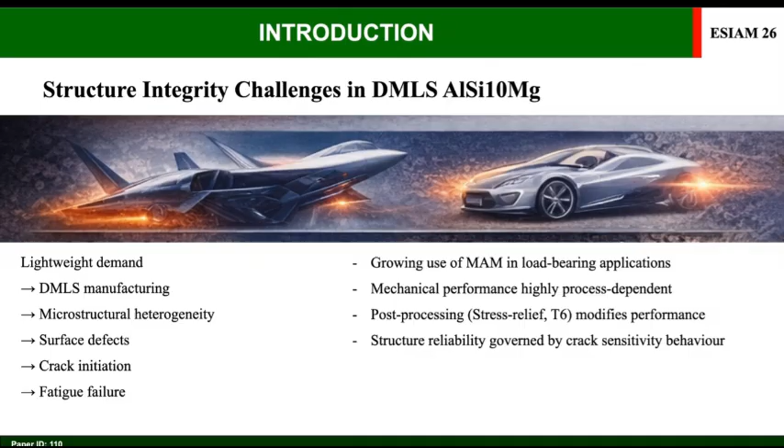Fatigue performance in AlSi10Mg is primarily governed by defect-induced crack initiation and propagation mechanisms. Therefore, the critical issue is not simply how strong the material is, but how it behaves when cracks initiate under cyclic loading.

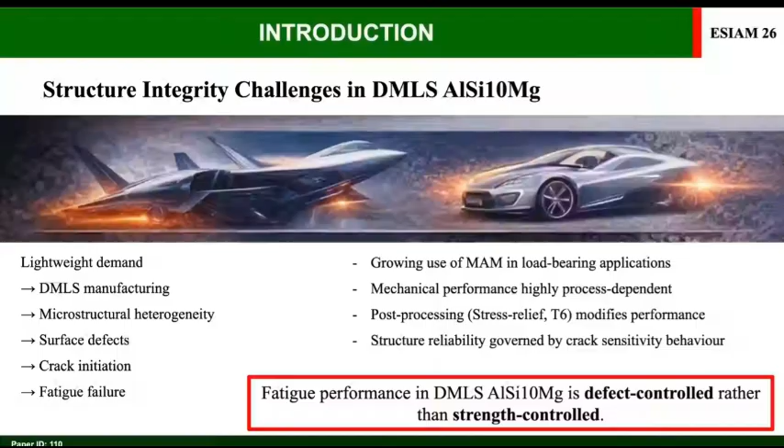Although extensive research has been conducted on DMLS-fabricated AlSi10Mg, most studies prioritize static tensile properties or simple fatigue life measurements. Additionally, load ratio, specimen geometries, and testing frequency limit direct comparison between studies.

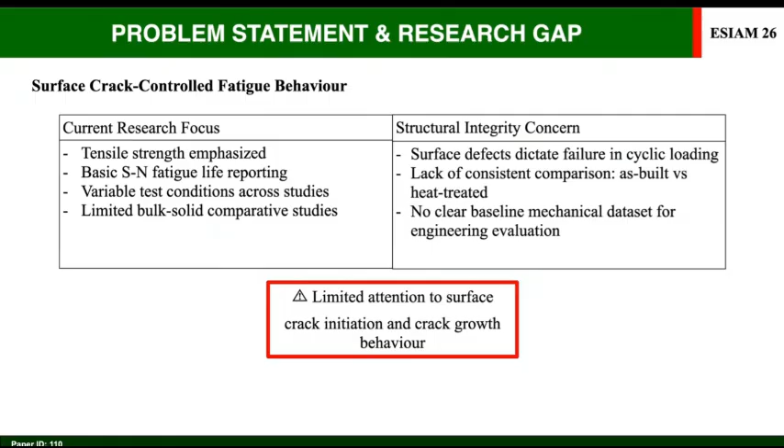Most importantly, limited attention has been given to surface crack initiation and early crack growth behavior. This is a critical oversight because in cyclically loaded components, failure is often governed by cracks initiating from the surface defect or stress concentration.

Without understanding the crack sensitivity behavior, improvement in tensile strength or hardness may provide a misleading indication of structural performance. Without the baseline, the structural integrity assessment remains uncertain.

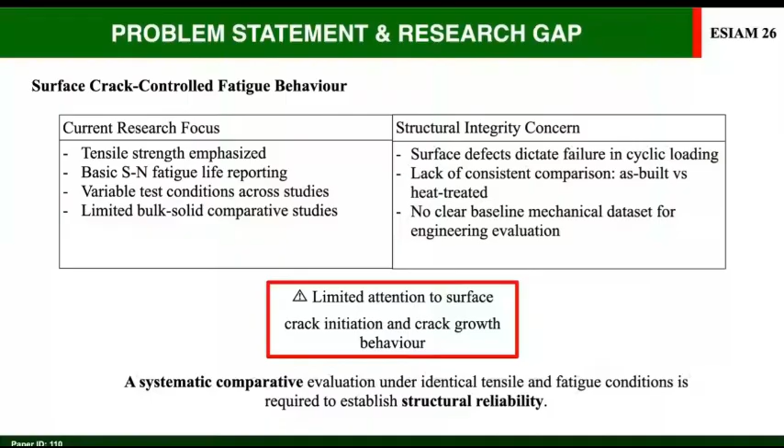Therefore, to ensure reliable structural evaluation and engineering application, it is essential to establish baseline tensile and fatigue performance data under controlled comparable conditions.

This gap motivates the present study by establishing clear comparable mechanical data and evaluating fatigue life performance under both material conditions. So based on the problem encountered, the objectives of this study aim to investigate the mechanical properties of DMLS-fabricated AlSi10Mg.

First is to compare the effect between the as-built and heat-treated conditions of the specimen. Second, evaluate the tensile strength and fatigue life performance under controlled cyclic loading.

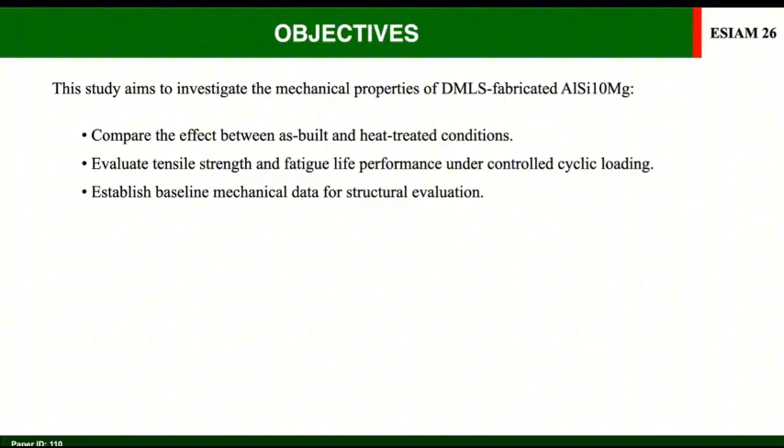Last will be to establish baseline mechanical data for structural evaluation, carried out through the configuration of an experimental work.

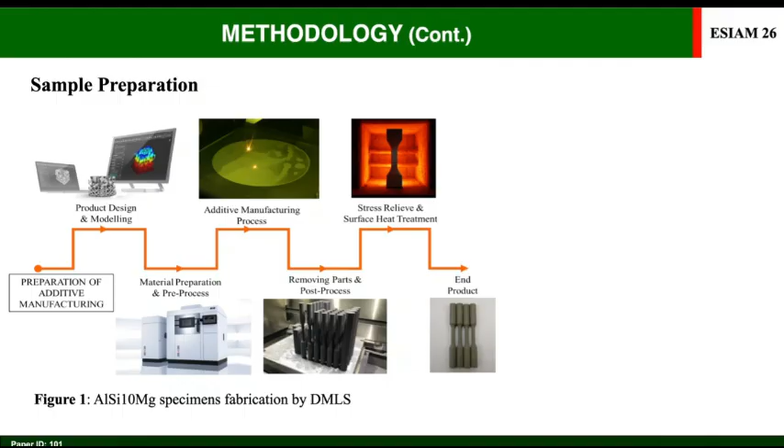In this study, the specimen is fabricated from a CAD input and printed by DMLS. After removal from the chamber, part of the specimens will be further processed by heat treatment: stress relief, solution heat treatment, and artificial aging.

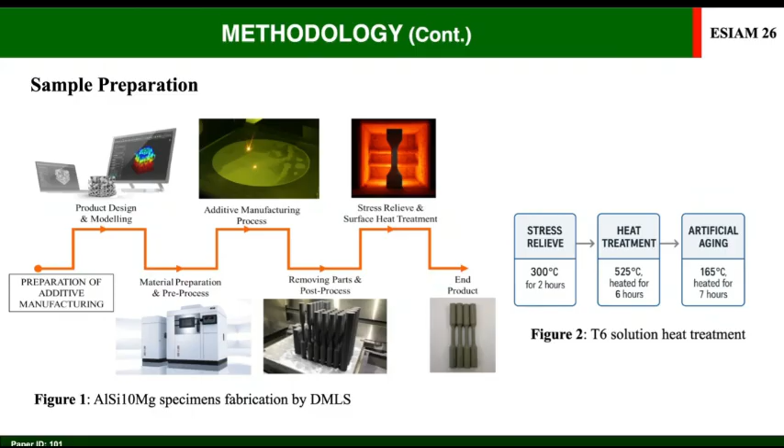Then all as-built and heat-treated specimens have been tested via mechanical testing: tensile, fatigue life, and fatigue crack propagation.

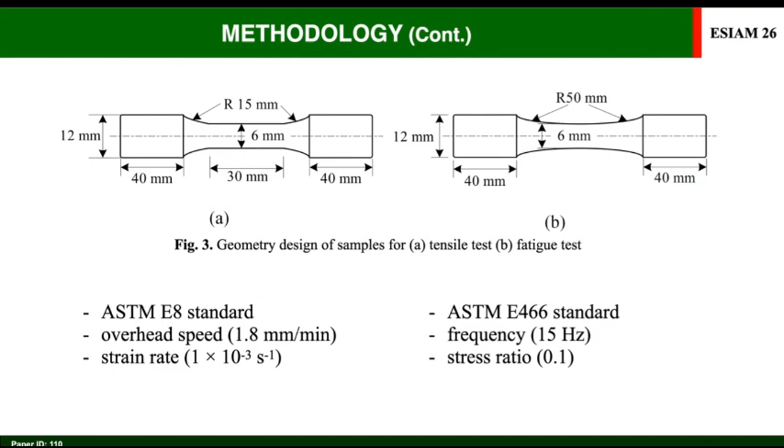Figure 3 shows the dimensions of the tensile and fatigue test specimens according to ASTM. Figures 4 and 5 show the geometry for the compact tension CT specimen, with dimensions as in Table 1.

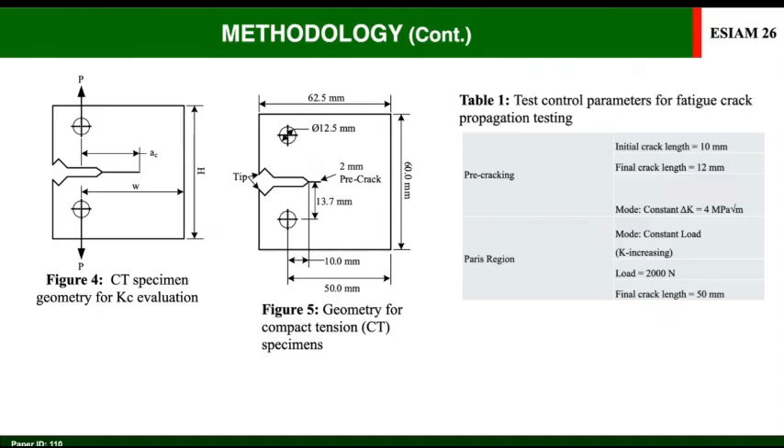Figures 6 and 7 show the setup of the CT specimen by Instron machine. The evaluation of the critical stress intensity factor KC is carried out.

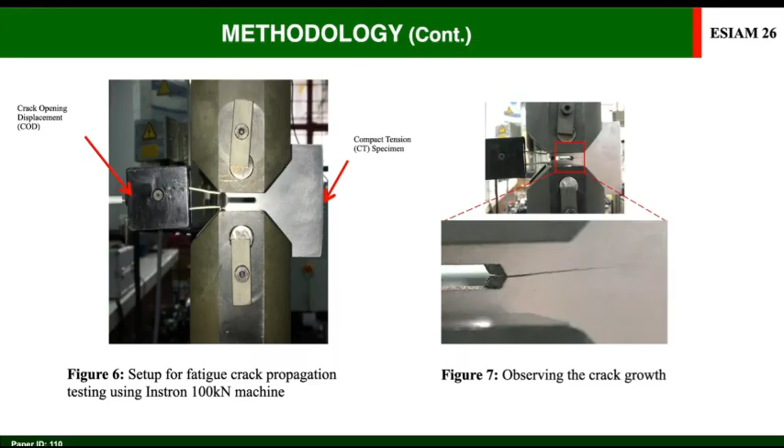The test is performed in two stages. First is the pre-cracking, second is the Paris region, conducted using the servo hydraulic fatigue test machine, while the crack opening displacement (COD) is attached to the tips of the knife edge at the specimen.

Based on the experimental tensile test result, heat treatment increased the UTS and strain performance. Meanwhile, most literature results show decreased UTS but increased strain performance after heat treatment. However, Wycisk's studies show a reduction in both UTS and strain after T6 heat treatment.

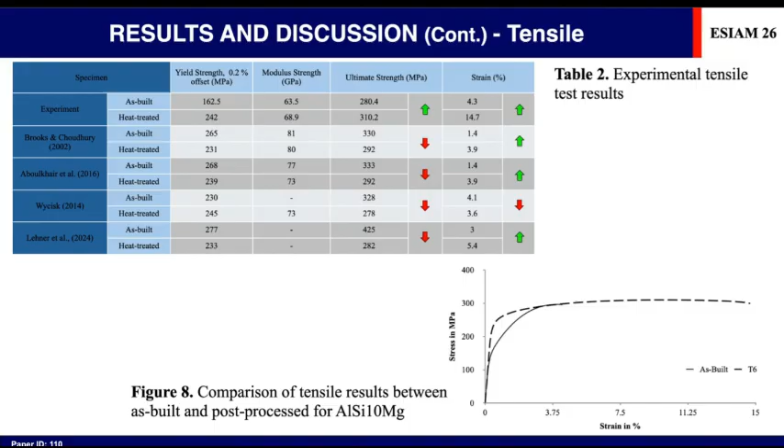For the fatigue behavior, the fatigue life result is better compared to the previous study. One reason is the author performed the solution heat treatment for T6 differently, in terms of the duration period.

In comparison to the as-built specimen, the heat-treated specimen shows a similar number of cycles in terms of stress range, with favored fatigue behavior in the low stress range and no overrun during the test, even at the maximum stress.

At stress more than 200 megapascals, the fatigue life is limited to the low cycle regime. The T6 specimen shows longer fatigue life at comparable stress levels.

The residual stress is reduced and grain stabilization improves homogeneity, also reducing scatter. Therefore, the T6 treatment significantly enhanced the fatigue resistance.

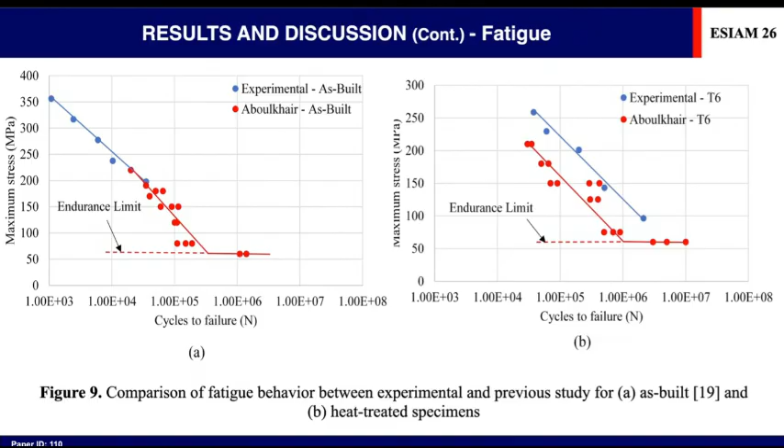As previously mentioned, Paris law is applied in predicting the fatigue crack growth. From the fatigue crack propagation result, the evaluation of the material property value C is 1.85 times 10 to the power of -9, while n is 3.69.

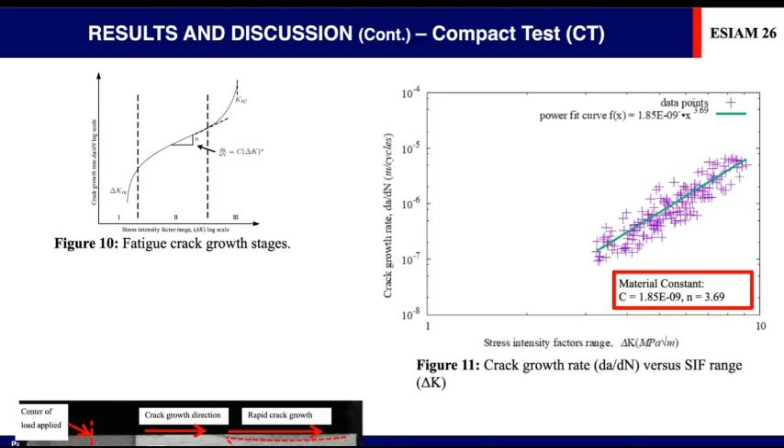Figure 12 presents the fractographic assessment of the CT specimen. During pre-cracking under constant loading, the crack propagation is stable and linear, producing a relatively smooth fracture surface. However, once the crack reaches approximately half of the specimen width, rapid unstable growth occurs.

The fracture surface becomes rougher, and small shear lips are observed along the free surface, indicating predominantly brittle behavior with limited plastic deformation. Monitoring the shear lip formation is essential to ensure experimental validity.

Therefore, using the measured critical crack length prior to instability, the critical stress intensity factor was calculated, giving a KIC value of 15.54 megapascal square root meter.

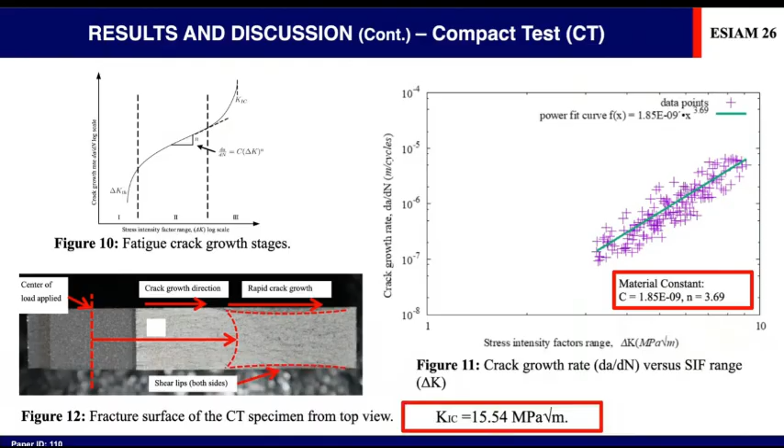In conclusion, the mechanical properties of this alloy after T6 heat treatment show improved tensile strength and ductility. At the same time, fatigue resistance is also improved compared to the as-built condition under equivalent loading levels.

Lastly, the combined improvement in strength, ductility, and cyclic stability indicates that post-T6 processing plays a critical role in optimizing the structural performance of DMLS-fabricated aluminum AlSi10Mg.